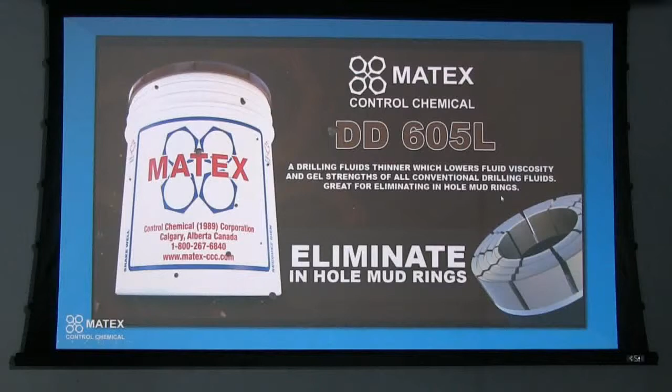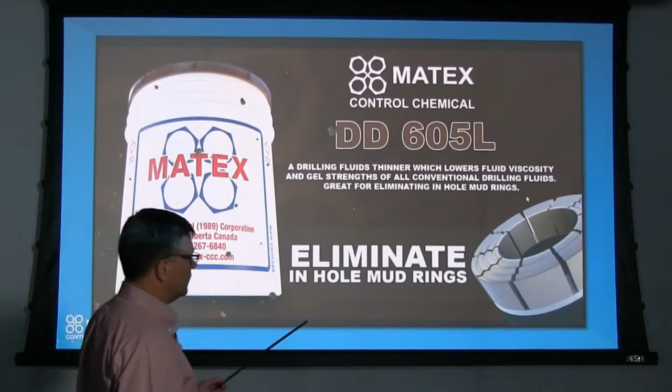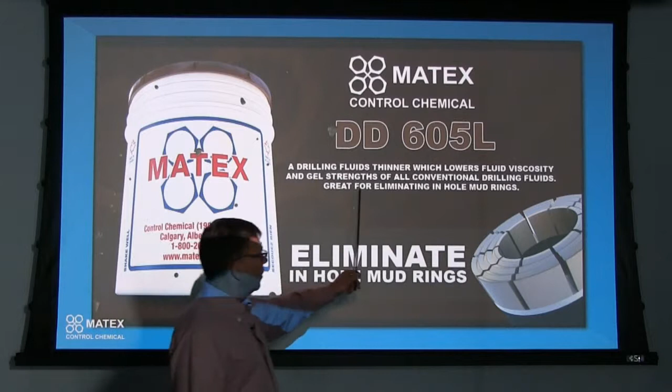I'm going to speak to you about one of our products called DD605L. The DD605L is a much different product from any of our drilling fluids and polymers, etc. This is a drilling fluids thinner, which lowers fluid viscosity and gel strengths in all conventional drilling fluids, and it's great for eliminating in-hole mud rings.

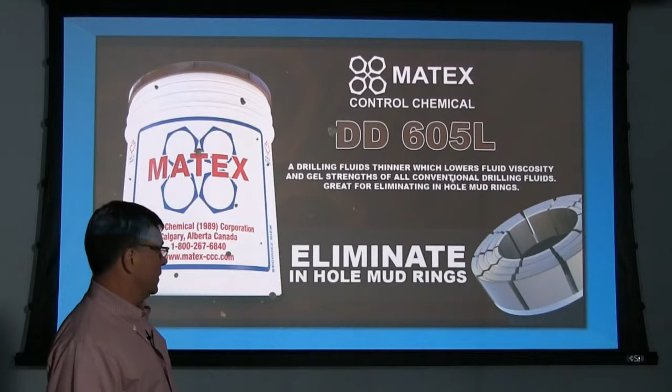This product you must be very careful with. You won't see it in the field on every job site and whatnot, because we would only want to have it in somebody's hands that's quite familiar with it, because it can do some damage if it's not used properly.

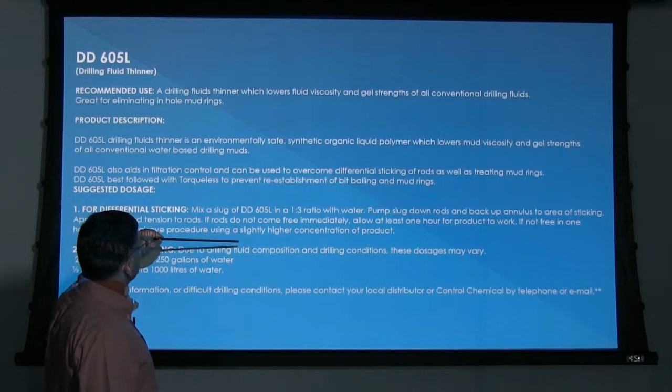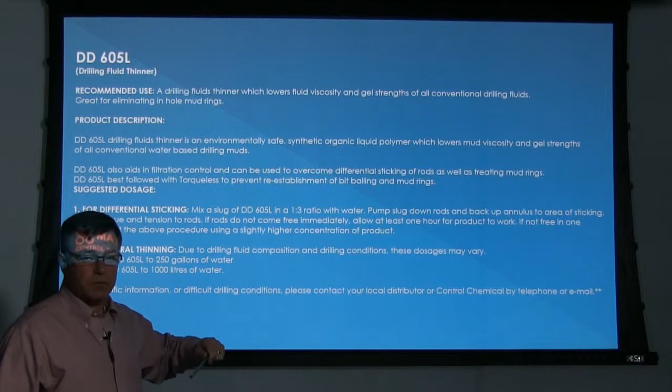Included in this presentation is the spec sheet, and I put it in here just to show you some different ratios for different applications and whatnot. As I always say, always refer to the spec sheets for your mix ratios, so that's why it's in here.

In this video here, we have 605 mixed with water, and this is 2 parts water, 1 part 605. We just want to show you exactly what this product does, because I say it can be very dangerous.

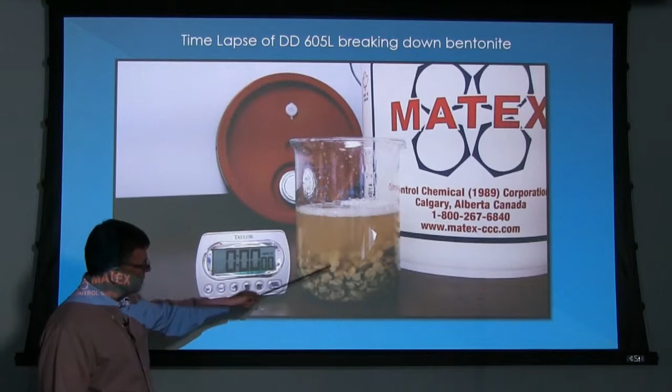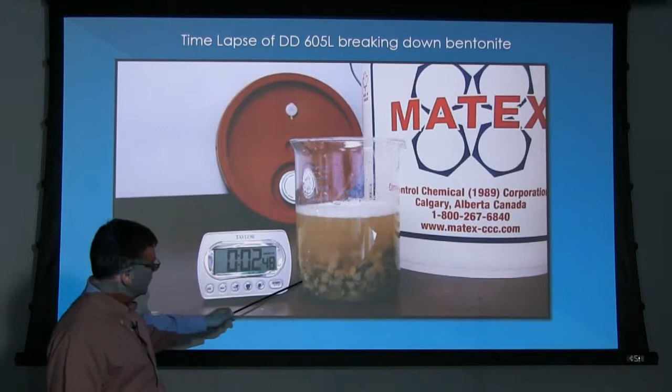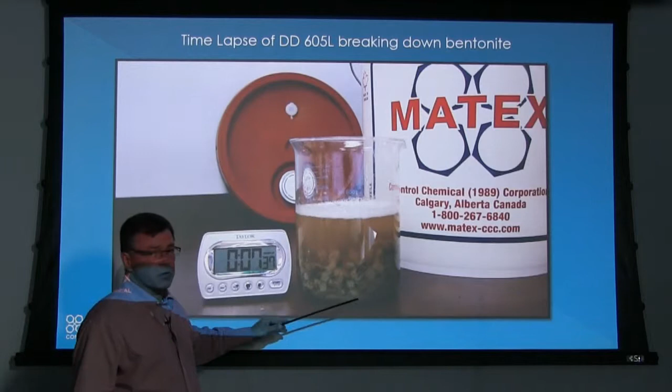We poured some bentonite chips in here. We've got the timer going, starting off at 0 minutes. We've fast forwarded this so you can see what happens. We'll go up to about 12 minutes here, but keep a close eye as to what's happening. This 605 will break these particles down, and this is bentonite chips, so just picture this as done in a clay formation, what it's doing to this clay. It will start to work on this very quickly.

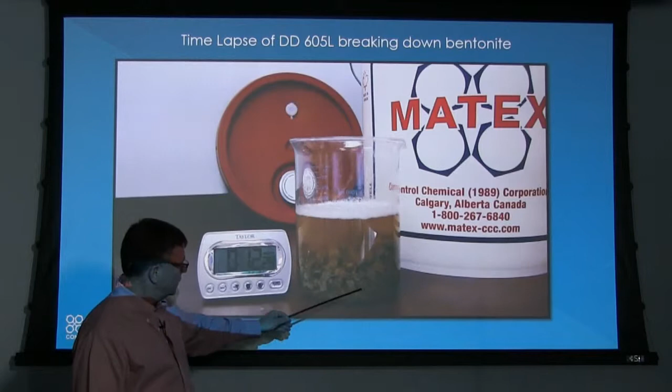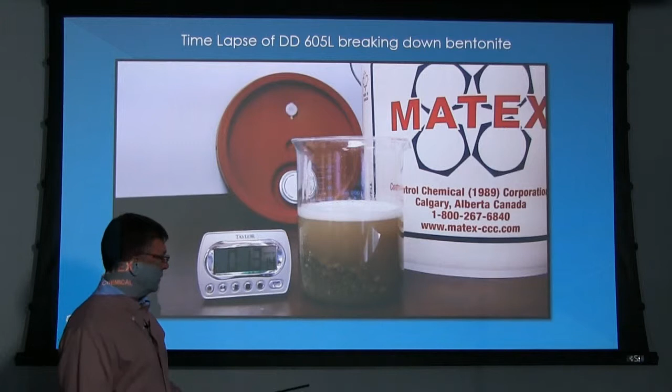There's 10 minutes, you can see it's starting to break it down very well. Now this is just sitting still. Once we agitate it a little bit, we threw a stir stick in here, and you can see that these particles have broken down probably by 100 times already. Eventually, and that's in 12 to 13 minutes, it will break down to the smallest particle of clay that might have formed and gummed up this mud ring on you to start with. So that's how powerful the product is.

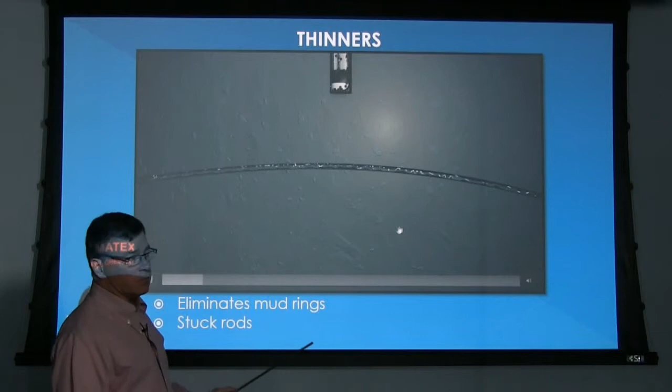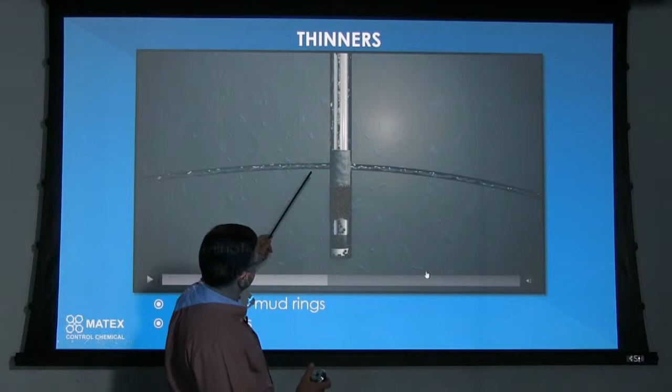This animation here that we're going to show you is a potential mud ring forming down your hole. So we're drilling away, there's your cuttings coming up out of the hole as we're drilling. We hit an aquifer here, maybe in some clays or what have you. Let me just stop it right there for 1 second. As the water is coming down, and I'm sure we've all experienced this before, as the water's coming in here, you start to lose your circulation, and you're watching your torque, you're watching your pressure build up a little bit. It's because there's a mud ring that's forming here.

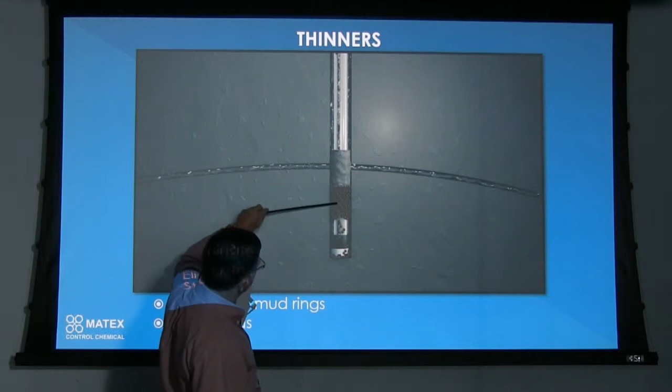If you don't catch it in time, then all of a sudden your cuttings aren't getting passed up to the top of the hole anymore. They're starting to accumulate down here as well. So you've got your mud ring plus your cuttings.

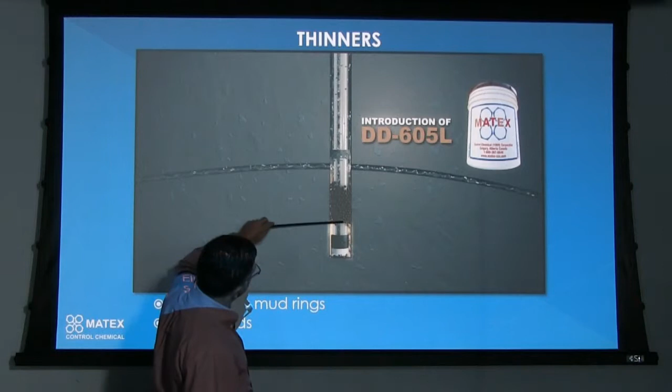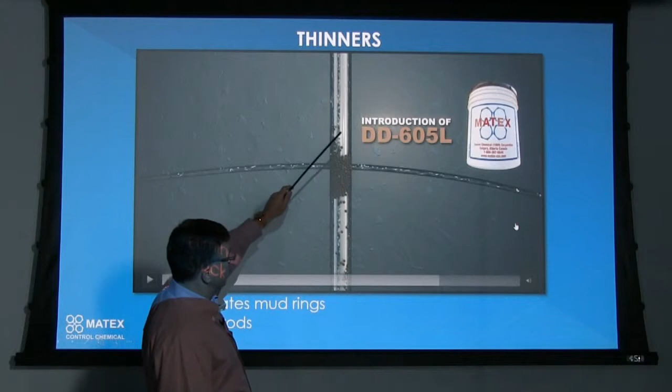At this point, start this again. The color of the 605, you can see it's been introduced down the hole. As you seen where it was starting to eat it before, stop that right there. It eats the mud ring out, gets your cuttings moving back up the hole again, and we've colored this so we can show you where it's coming in the hole and exactly what it's doing.

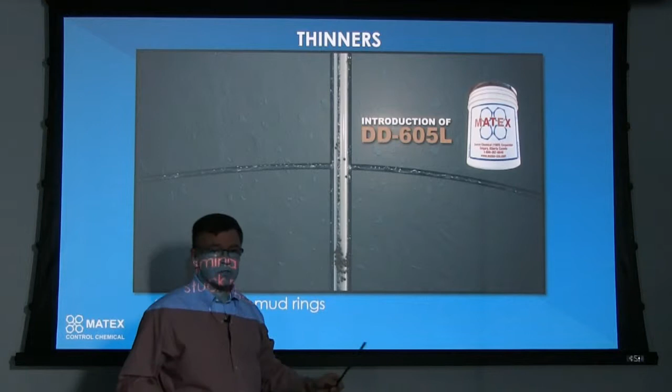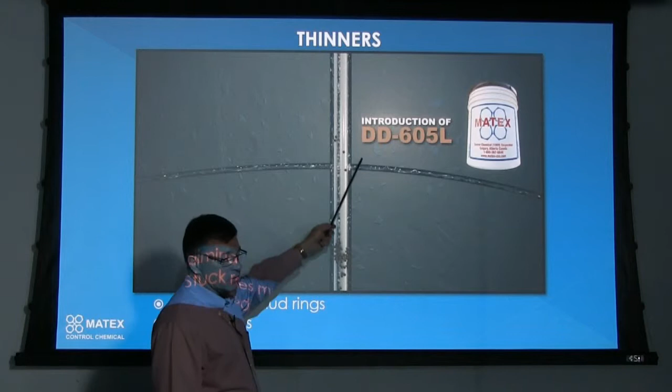Then, after it cleans your mud ring out, see the color goes away again, because you can treat this as a pill, if you will. You've put the pill in the hole, you've cleaned it up, and because it is so powerful, you want to clean it out of there and then get a good polymer or a good fluid system back in the hole to continue to keep your hole stabilized.

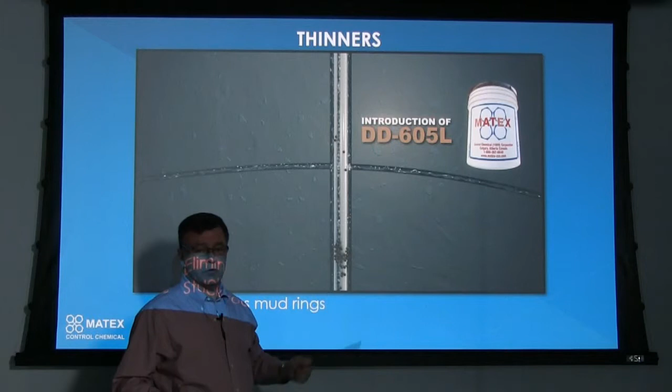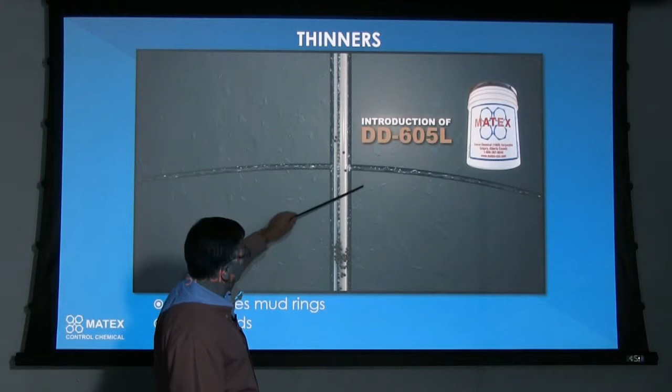Now, if you started off drilling the hole with a good fluid system, you're probably not going to run into this situation anyways. That's what we try to avoid with a good balanced drilling fluid system using polymers like Sand Drill, Torqueless, and 2000, etc. DD955 will help you eliminate the mud rings by keeping the clay in place to start with.

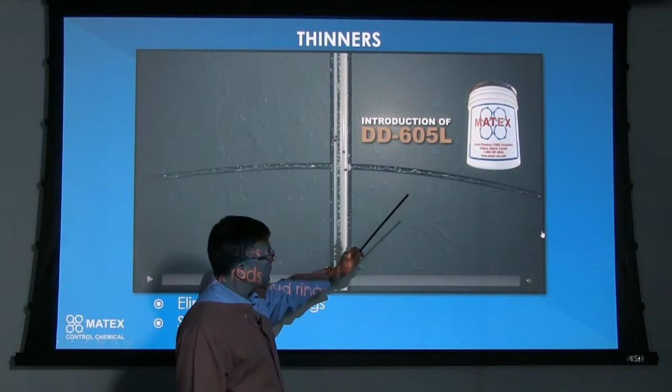So again, this is a very specialized product. It's a very dangerous product, because once you clean that hole out, just make sure that you go back, put a good well-balanced mud system in there, and away you go.

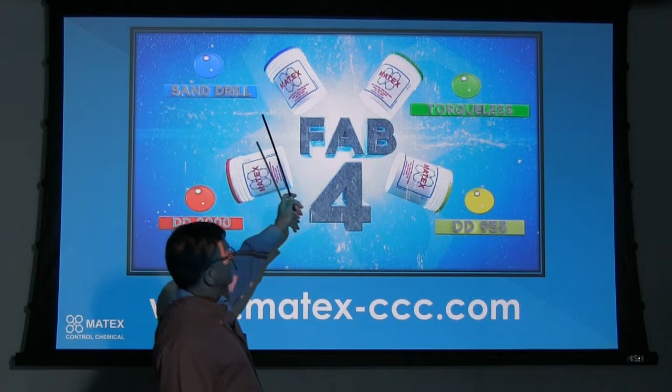And that fluid system could be, again, made up of Torqueless and Sand Drill, a little bit of 955, or Torqueless 2000, maybe a little 955, and that'll coat your hole, probably fill that void down there, and away you go.